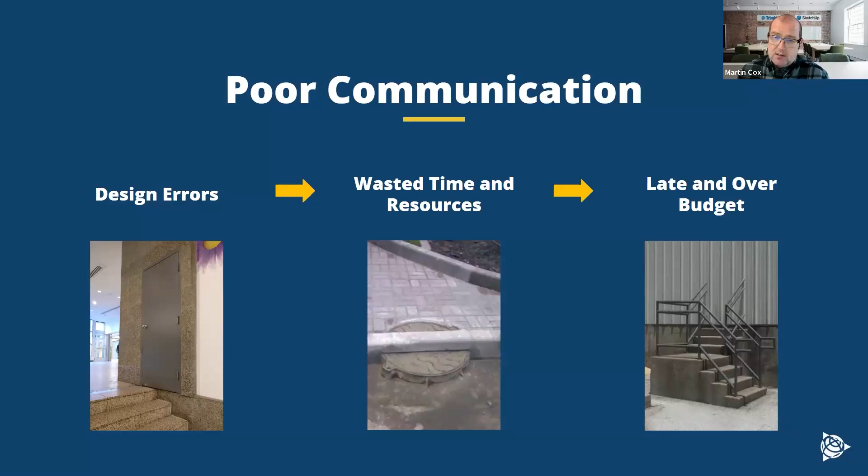So first of all, what is connected construction? We talk about the three C's, and these are fundamental building blocks within that construction process, that work across the entire Trimble portfolio and also other pieces of software as well. SketchUp is a true collaboration tool, and we'll certainly talk about that. So the three C's in connected construction.

So we have connected. This is breaking down these data silos to improve interoperability and document management. The benefit to customers is that all aspects and the different phases of a construction workflow are easily shared, easily discussed, and easily understood, so everyone can work through this as well.

Then we have our content. Streamlining our workflows means that we have our library of data, all curated, so it can be traceable. The benefit from this means that everyone is looking at the same thing. So somebody's not looking at an old version of a drawing and mistakes are made there. People know where something goes, how it needs to be installed, and the equipment that you have at that time.

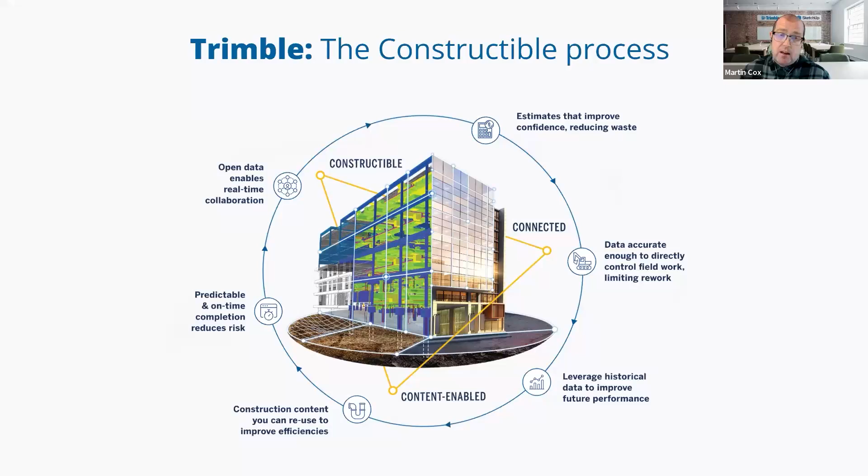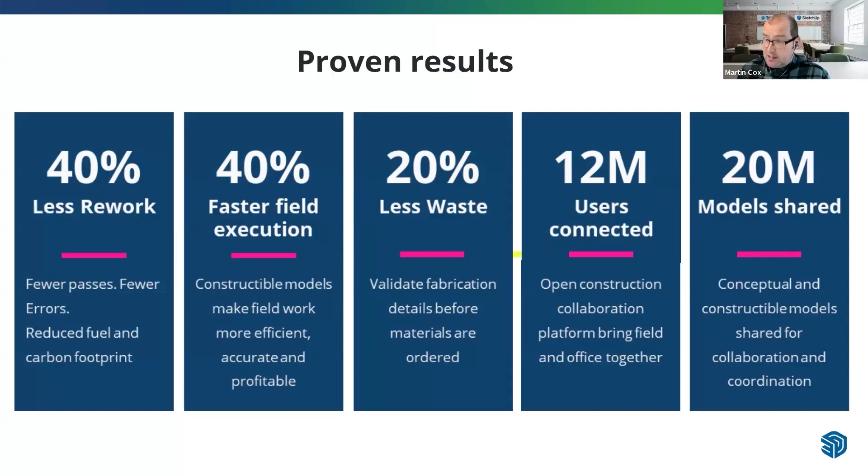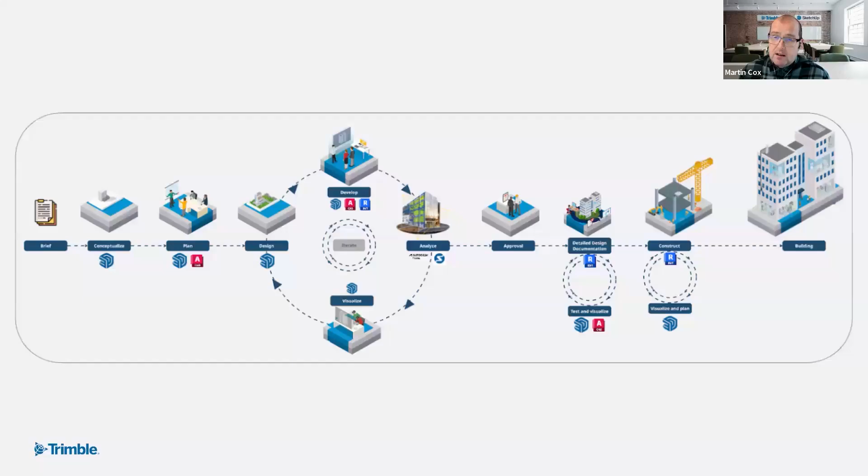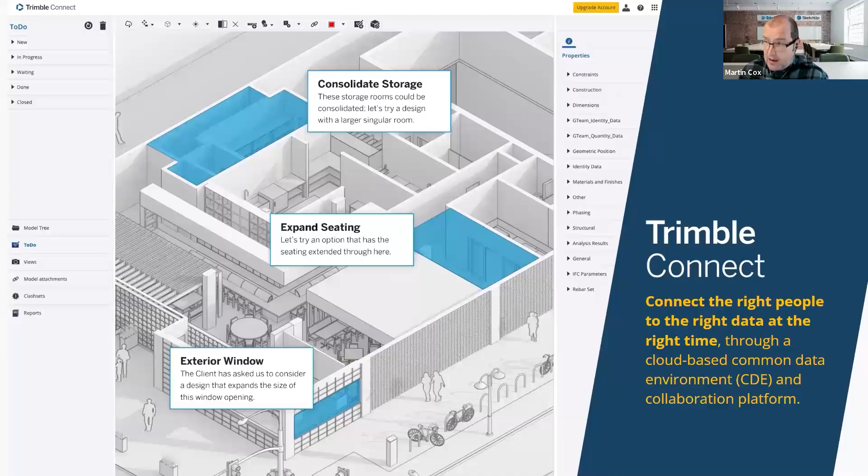But a key part of this is our connected construction. Trimble Connect comes with the SketchUp license. Trimble Connect is a cloud-based platform that connects the right people and the right data, so everyone has access to this. Okay. So how does SketchUp really help communicate?

So now we're really going to focus in with SketchUp. Now, it's worth mentioning that as I'm talking through the next slides and with our example demos as well, we're going to be looking at multiple versions of SketchUp. So there are different levels of SketchUp. We have SketchUp Go, SketchUp Pro, SketchUp Studio, and there's other ones as well. And they have different tools and capabilities.

I'm not going to go into details in this webinar about all these different versions. Best thing to do is talk to your partners, talk to your reseller, and they will find the best fit for you, depending on the workflows that you're looking at for SketchUp. So just be aware that some of the tools, depending on the version of SketchUp you have, you may not have, but I'll try and point them out as we go anyway. But yeah, your partners will be able to help with that and recommend the best fits.

So where does SketchUp sit within that communication workflow, that structure workflow? We understand where SketchUp sits. We know that the majority of users are using SketchUp for visualization. Also presenting ideas and sharing those models as well, and documenting this. And then we start looking more around that model sharing, coordination, whether it's construction sites, estimating, analysis, and then fabrication. So we can really see where the power of SketchUp sits within our different workflows.

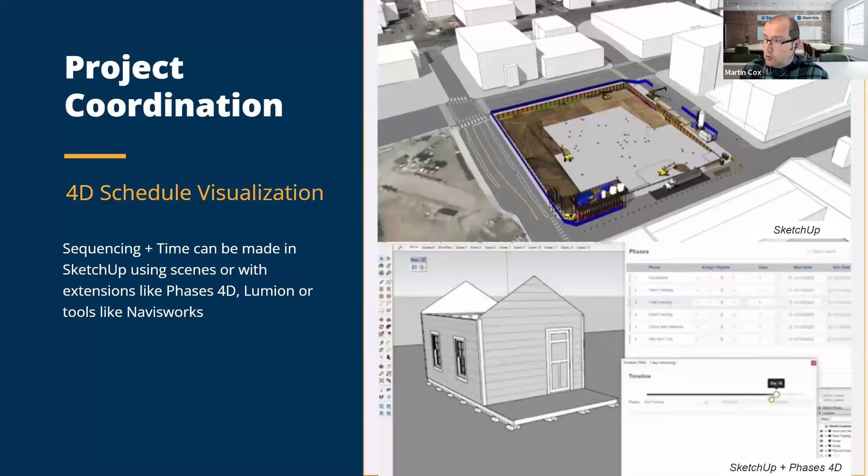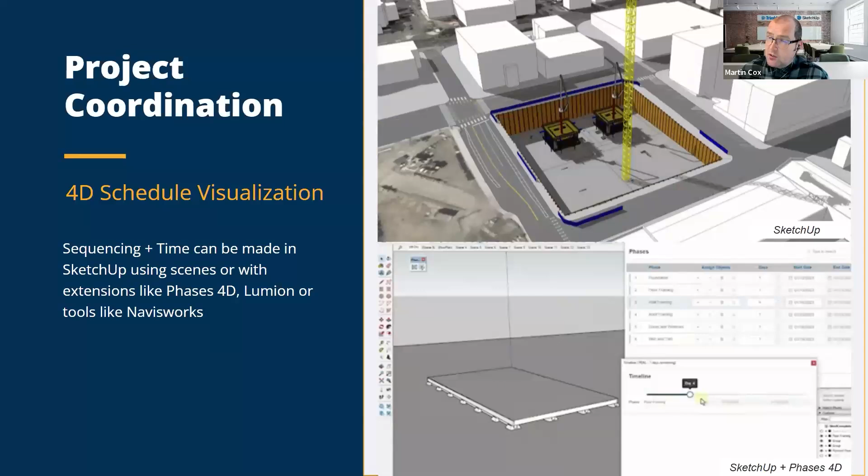Okay. There's also that project coordination. So the 4D schedule visualizations. With the addition of time, we can actually create these 4D schedules at different levels. So basic 4D sequences have been created within a planning model to show where the site is going to be, the stages around a site, and where things are accessed there. Or again, you can use different extensions like Phases 4D or Lumion, Navisworks, that actually create some of those schedules as well. Now that's one area within that coordination.

Another one is in project coordination around site logistic plans. With the complexity of construction projects, creating site logistic plans is standard practice now. Often, they can be a static 2D drawing that remains the same, but with SketchUp, these plans can contain full elements around the construction, as in we can show delivery routes, locations of where things are going to be. It's great to be able to communicate the site design to a customer saying, okay, this is where your site is going to be. This is where we're going to put our equipment. This may be where you're going to lose some parking spaces. So, this is where the communication comes in.

But understanding those processes, also being able to identify areas where there are potential inefficiencies, areas of concern or conflicts, like we mentioned about those timings of saying, well, while the glazing is going up, people cannot work underneath there. So, you have that area of glazing, you don't bring in the team to do some groundworks underneath the glazing. So, we can show that. And SketchUp is often used in these logistic plans because of its flexibility, because of 3D Warehouse, being able to bring in and say, okay, this is where a crane is going to be, this is where a lorry is going to be.

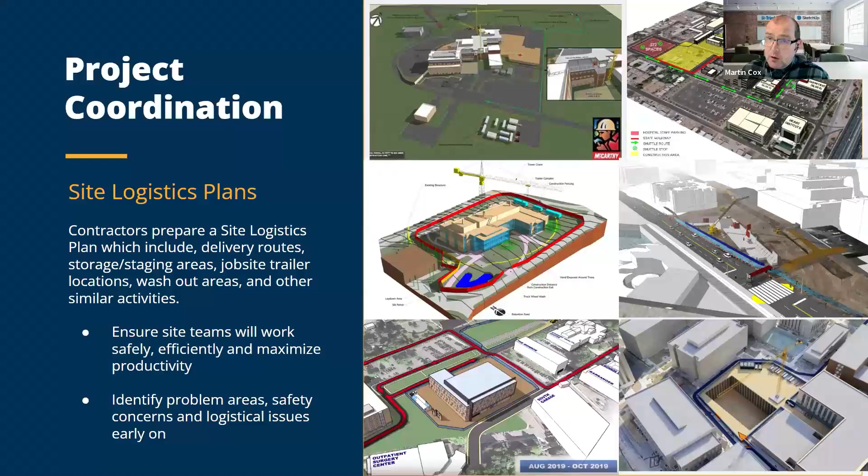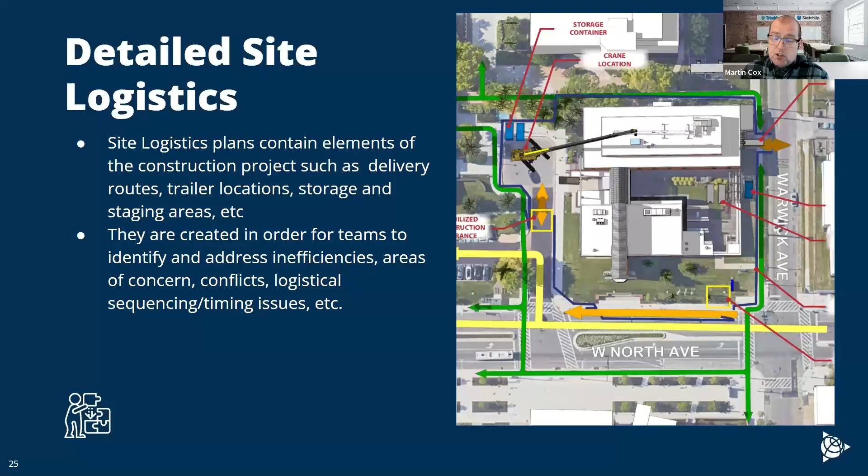And working within those detailed site logistics. Again, you can see how clear it is with our 3D plans here. We can show delivery routes, delivery locations, storage locations, those areas as well. And it really helps with all of those things that I mentioned. So this is a huge part of where SketchUp sits with a lot of our construction customers.

Now, something that still happens on a regular basis is these construction mock-ups. These are basically showing potential complicated areas, and construction companies spend thousands of pounds, euros, dollars, we're all over the world in this webinar, so they spend a lot of money actually showing a physical model of how, in these instances, these glazing assemblies are going to go together. They're quite complicated. The physical mock-up is usually developed before the actual assembly is going to be performed, so the trades can learn how things are put together.

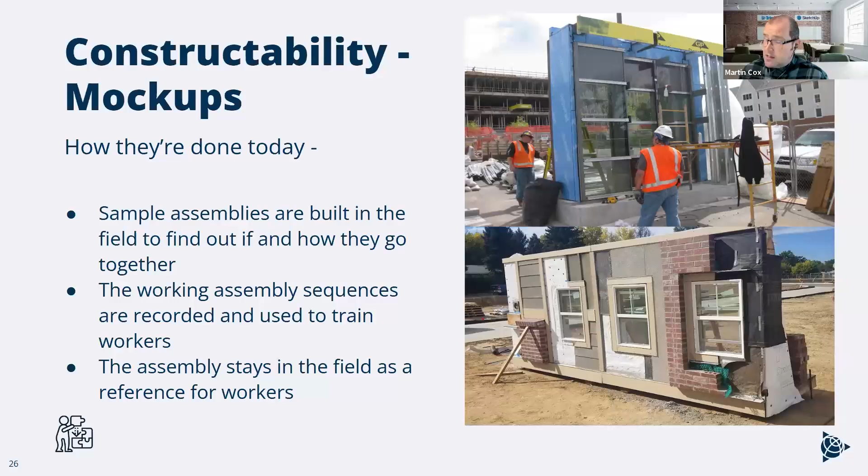Now, that stays on site. It literally sits there, so people come over and they have a look at that. But again, a big part of this is creating those virtual mock-ups. These virtual mock-ups are created before, nice and early, so they can assist the assembly processes. During design, models can be exploded. They can be shown with more detail. Even with those physical models that we saw, things can be hidden. So they're carefully designed so that they're almost showing those layers.

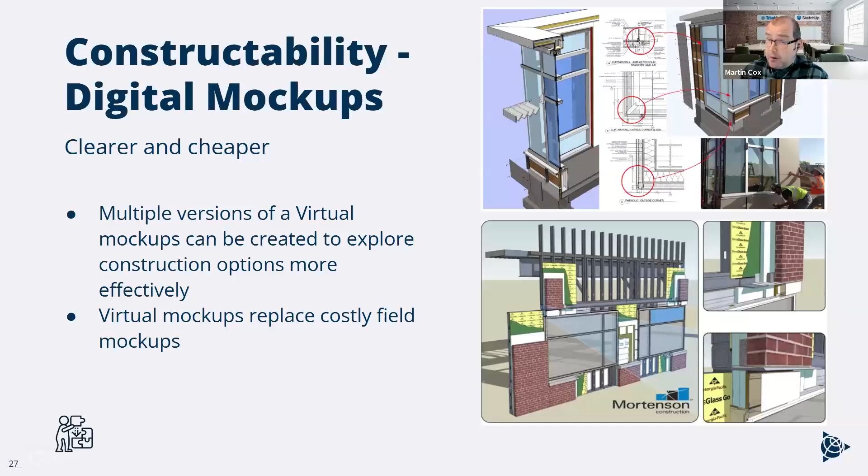Whereas a virtual mock-up can explode, it can be hidden. So we can show details here that you could never make, like this example here, seeing how that sits on top. Detail zooming in, cuts and those crops there as well. And as you can imagine, these are much cheaper to make, and it can go into much more levels of detail. So those three-dimensional details can really show the clarity, so it's more clearly understood on the job site. And these are all real examples, where we've worked with customers around the world.

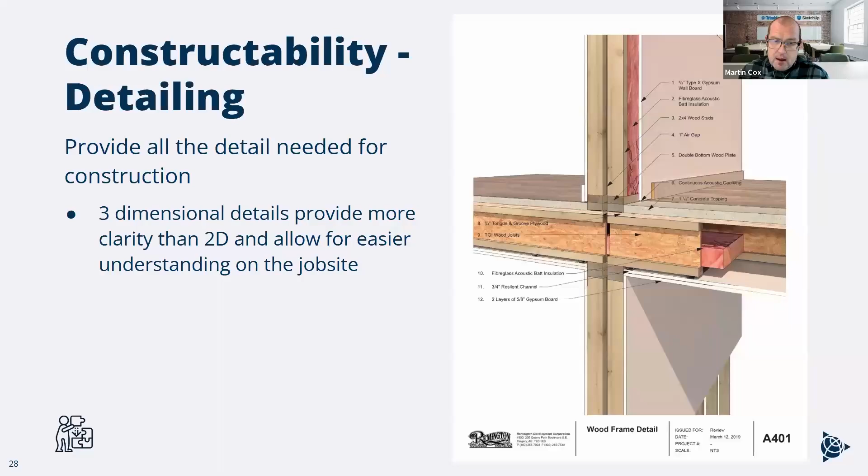Okay, so let's get into some actual examples here. Let's start having a look at SketchUp. Now, for the next example, I'm going to show a video here, and it will help explain this because I'm going to talk through these different options. I want to walk you through how some of this integration happens. We're looking at using Connect here, using SketchUp right from the beginning of a workflow and seeing how that expands all the way through. So right from literally setting up that site, but then we're going to introduce some other tools and see how they work within this workflow.

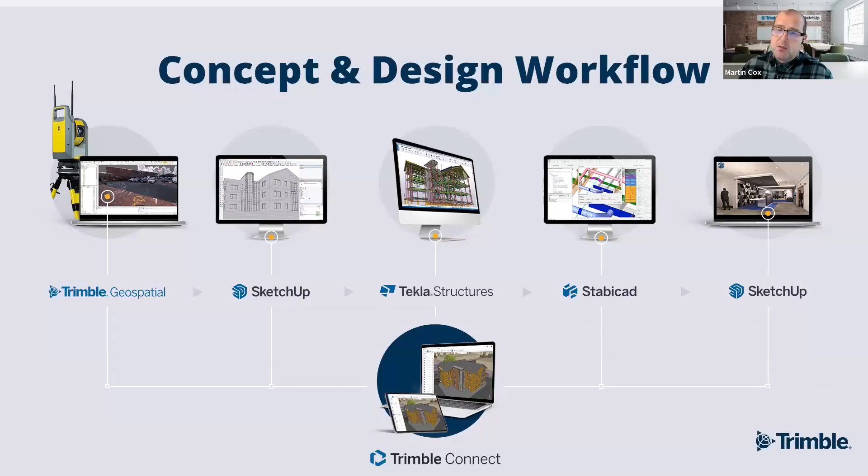So this is a video that I am going to talk through. I may pause it sometimes. I will be completely honest, I don't believe in trying to trick anyone with any video editing. The reason this is a video is we're showing a huge amount of information, different tools that I would be swapping in between, and it's much easier using this option here. So starting right at the beginning, we'll just start this video here.

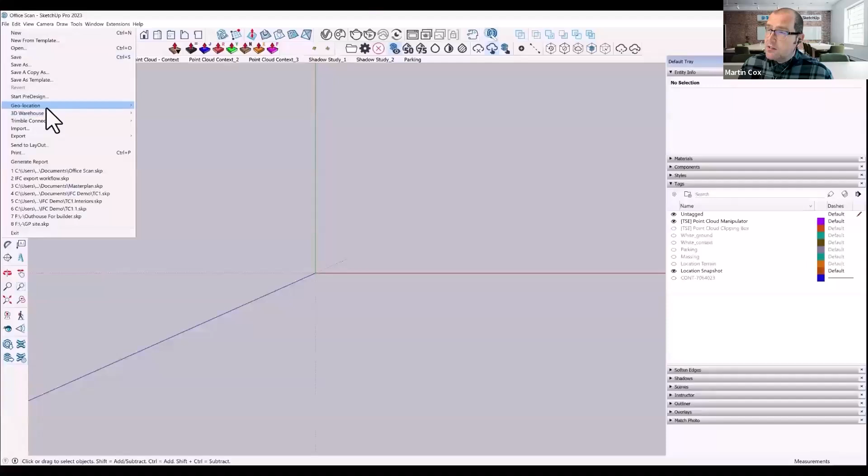So we can literally import the site information using Add Location in SketchUp, so it will be a geolocated model. Using the geolocation Add Location, we can import map data straight away. So bringing in this map data of our model, we then have our site plan. And this does contain the tags regarding the terrain. It's not overly bumpy, this area, but it does show that terrain for the model. And it means we can then quickly create a plan just using some quick 3D models.

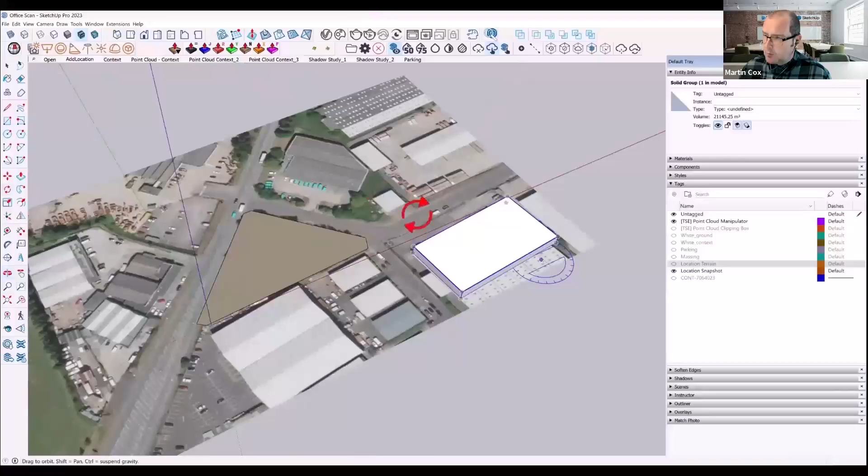And we'll jump to a model here saying, okay, this is how our site looks with some models around it. So this gives us an idea. We can look at shadows. We can look at how models, buildings that are going to be in place, will help with crane positioning as well.

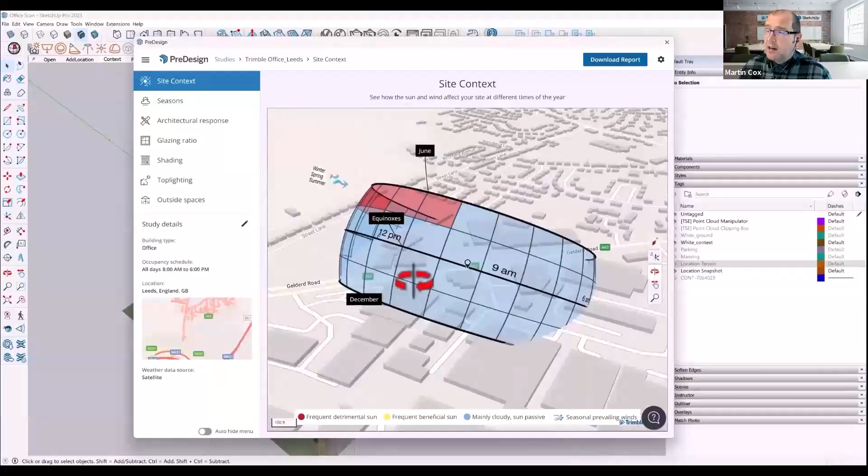Using a tool such as SketchUp PreDesign, because our model is geolocated, we can look at sun and weather data, which will help with the construction process, because we can look at historical weather data to see the type of light that we're going to get, how much rain we get, and, for cranes, wind conditions as well. So it gives us a lot of information here. It also goes further into architecture, but we're not going to look at that. Using a scan of the site, opening this with Scan Essentials, which is in the different versions of SketchUp.

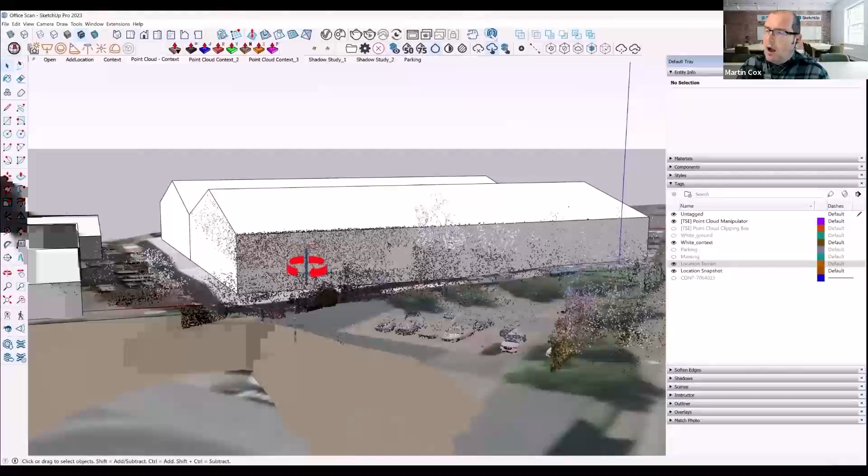So if you have SketchUp Pro, you won't have Scan Essentials, but we can actually import a point cloud of our site. So we have a real life scan here using Trimble's scanning hardware, and we can actually see the site now with regard to those building conditions around. So we can actually look at how accurate our models were with the actual buildings that were scanned. And we can really start analyzing it and making sure that we get these in the right position.

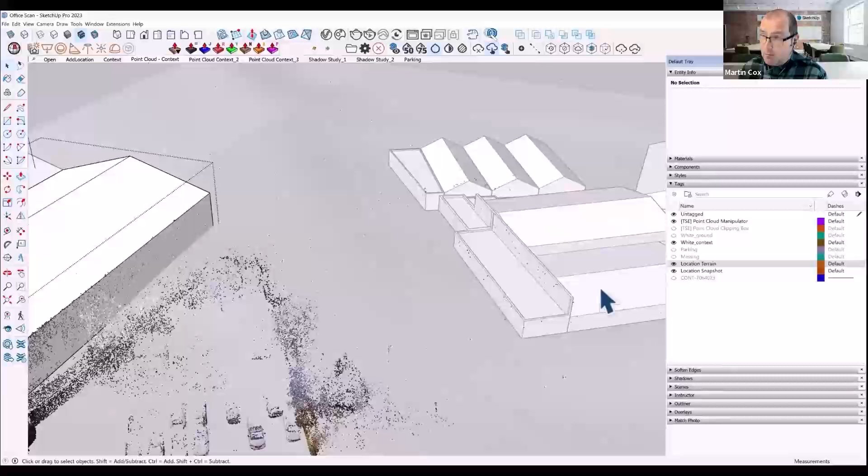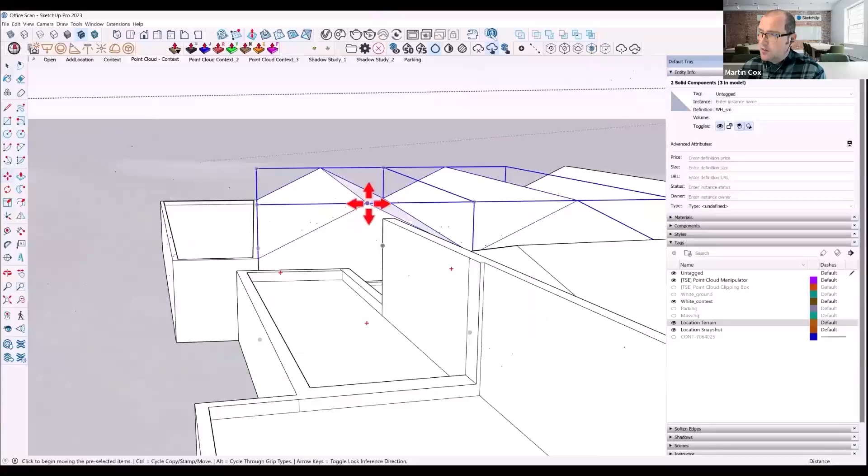Again, particularly important for access and machinery, because we need to know about potential overhangs on site. So we can see here, actually, there's a little bit of a roof that possibly we've modeled a bit lower. So using the SketchUp tools there, we can easily adjust that roof so it fits in with our point cloud.

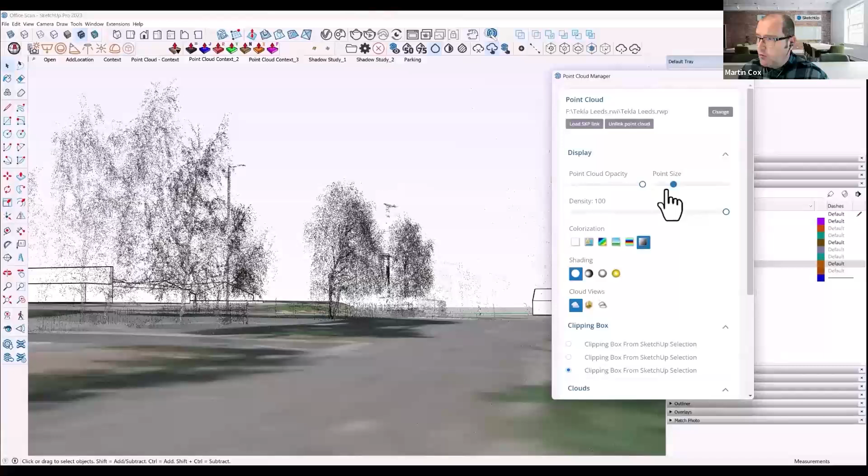Now, the point cloud is a great reference there. It means that we can see trees. It means that, like I said, particularly with deliveries and access around there as well, we can make sure we're aware of those trees. But there are a number of other tools within Scan Essentials where we can show things clearer. We can change the point size of our point cloud, but we can also actually analyze the model so we can compare the point cloud to our SketchUp model.

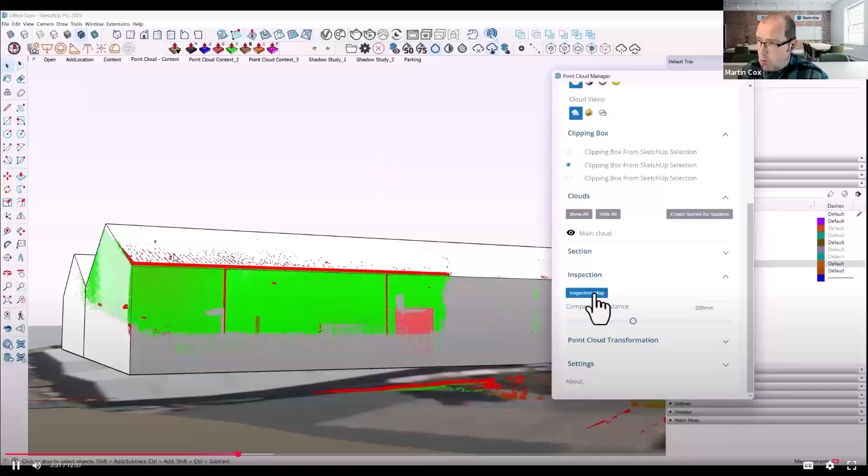So what we're showing here is that using the inspection tool within Scan Essentials, we can actually show if our model is correct. And on here it says 200 millimeters. So that little red area means that our model isn't quite right with the inspection there. But there's a lot of information.

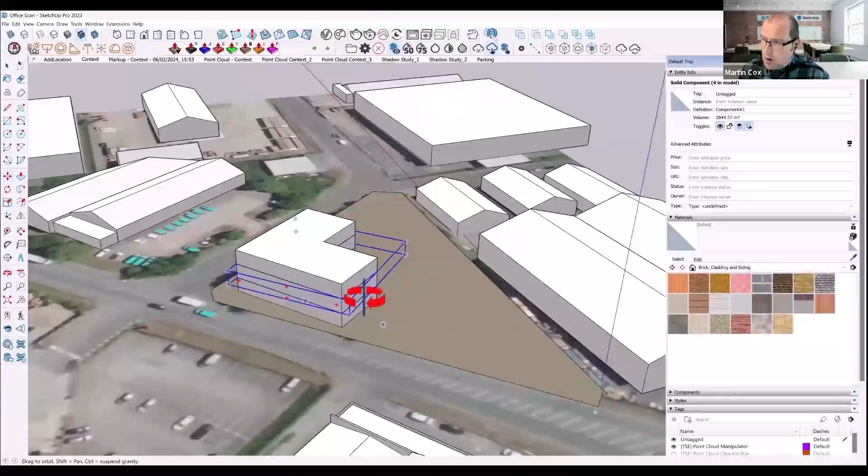Then we have our site. Using SketchUp, we can now create our concept design for a model. So concept design at the beginning, we're not thinking about how we're actually going to build this. This isn't our full constructible model. This is showing some ideas. So this is a video here showing how quick and easy it can be for SketchUp to create a model to show visually for people, saying, okay, this is our site, this is our plan. What do we think about the idea of the model here?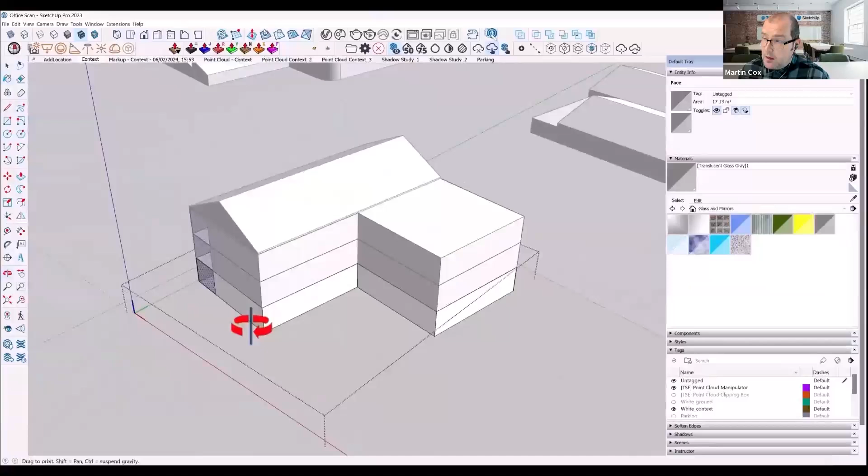We can create simple block models using components. So each of those floors is its own component. So we edit one, it edits all of them. And we can then say, well, actually, let's put some glazing on the corner here. Let's put some of those brick materials on. And we can place our roof how we want it.

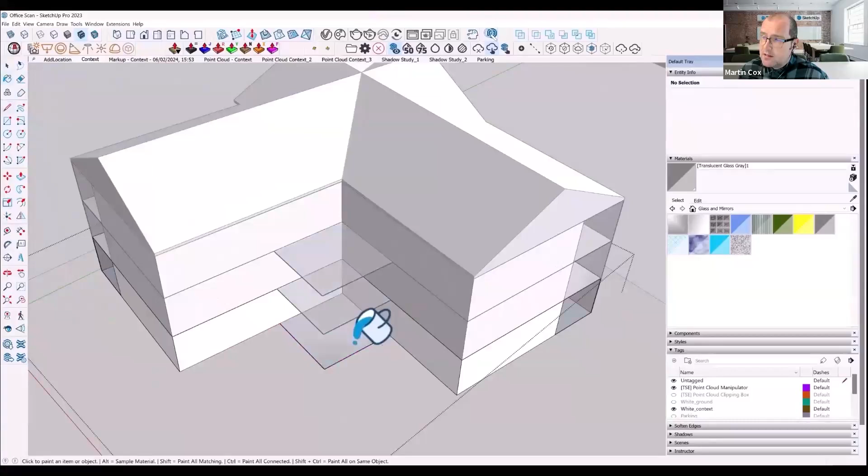Again, just think about how quick and easy it is that we're doing this, but for our customers to be able to say, okay, is this what you're thinking? Let's have a look at our site here. And is this the type of thing you were looking at? So being this fast, this easy to do is tremendously powerful. And just creating those simple models is great.

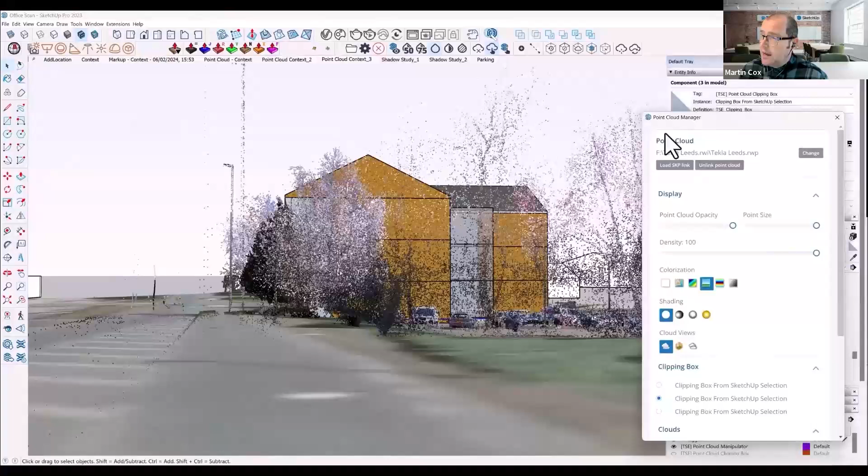And then, within that planning, we can start thinking about our site there. So we're just finishing up here, combining that with our point cloud. We can see how it sits within existing trees, basically the existing site that is actually there. With that scan, we can incorporate that. So we need to be aware of those trees, particularly with construction. It's like, right, well, we're not going to put a crane there. So it's being aware of our environment.

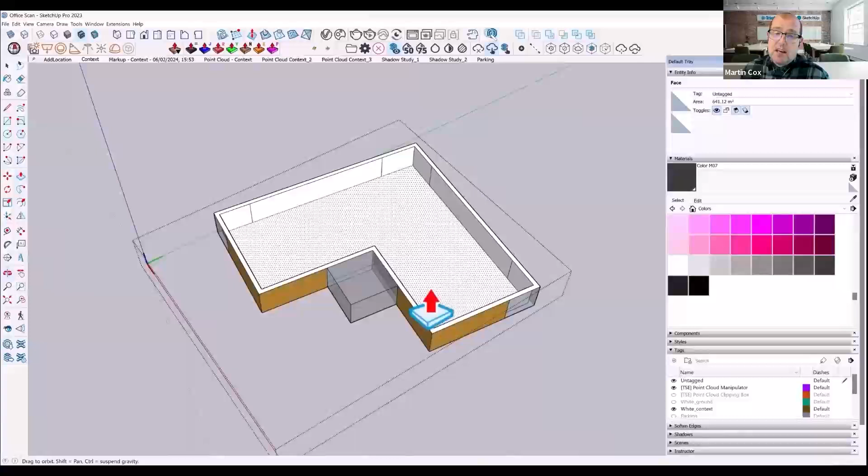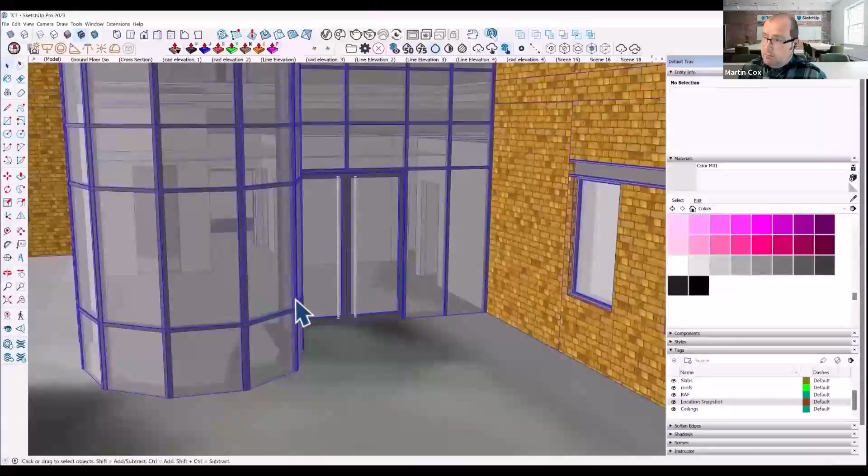And we can also start thinking about that on the interior as well. So it basically takes our model and then those iterations around the model. Okay. So we've got a little further with this. We've added some logos, a little bit more glazing detail. But then bringing that on site, again, just being able to show the details, we can really start saying how this glazing detail is going to be made around the staircase and a little bit more information about the interior of the buildings.

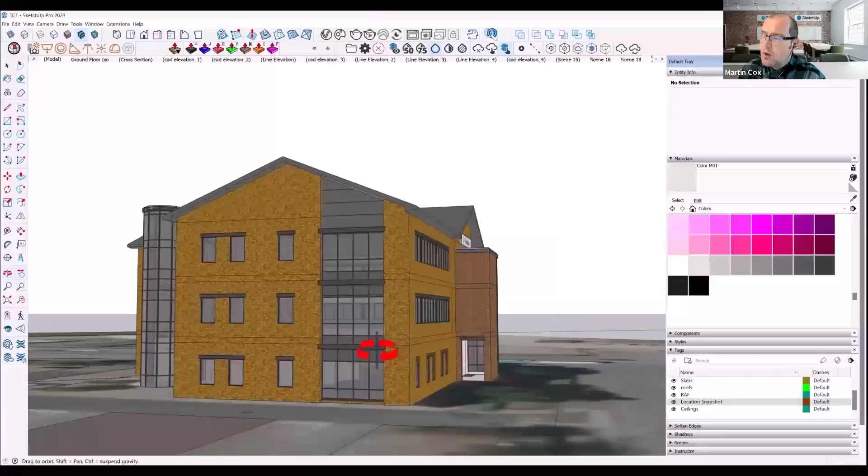So now we're moving into, we have an architectural model. But taking this, again, communication around that. We start having our model. We can start putting this into Trimble Connect. We can look at this and then say, okay, well, using the different tools in SketchUp, we can actually have our line elevation models and create our information packs in LayOut to show the drawings and capabilities around here.

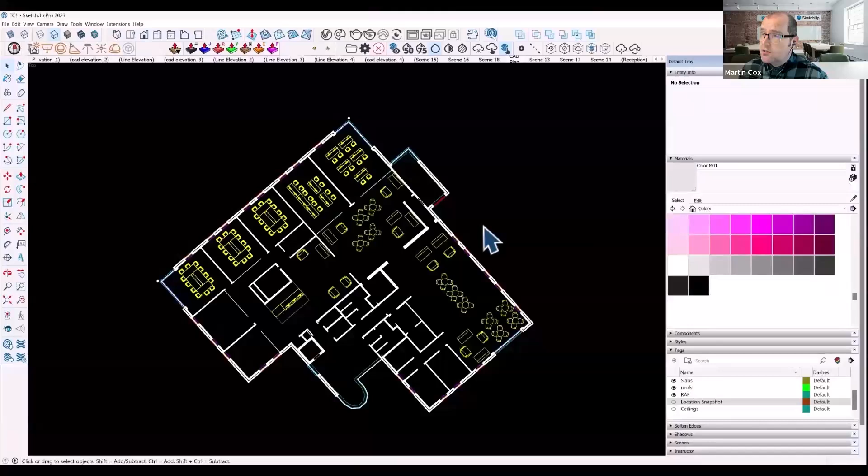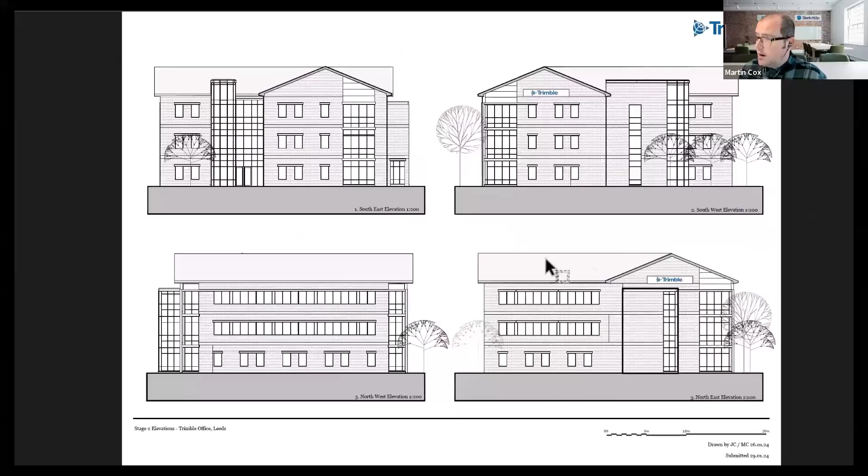So, we're exporting this to LayOut, Trimble Connect in this instance to start with, but then within LayOut, we can have our drawings and at least show people, like, yep, this is how your model is going to sit. These are the intentions of our training rooms, just an idea of how it's going to look. But then we can take it even further with connected construction.

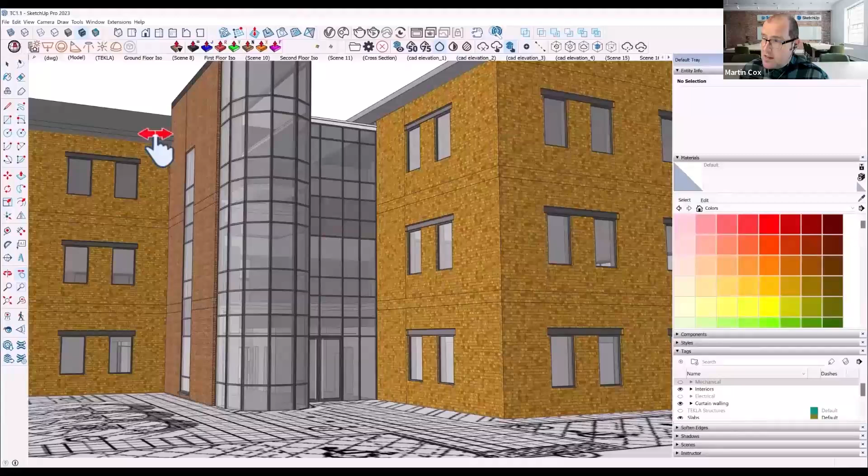So working in Trimble Connect here at the moment. Inside Trimble Connect, we have the structural models. We have the MEP models, which are the electrical and plumbing models. So, mechanical engineering, electrical and plumbing, sorry. So, we have all of the models within Connect. Now, the great thing about this is once they're in Connect, we can then use these actually within SketchUp.

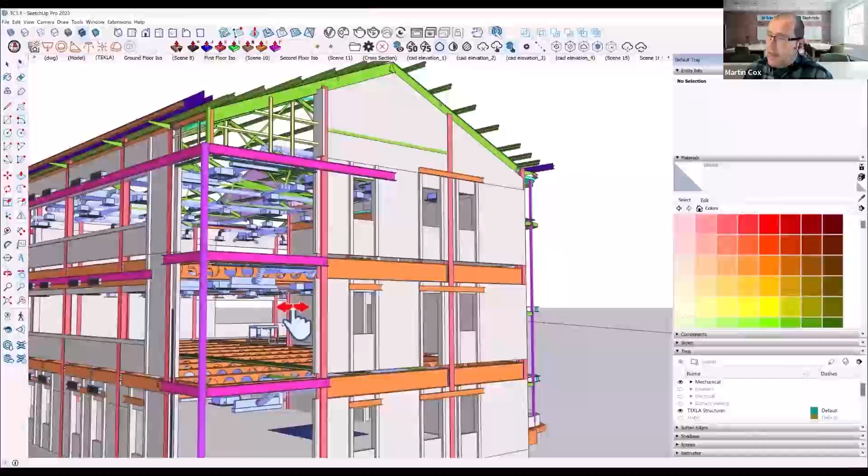So we've imported the Tekla Structures model in SketchUp here, and we can see how that Tekla model looks. But we've also imported the MEP model in here, so we can look at the mechanicals around our ductwork and piping. So we've got our HVAC equipment there. And now we've got our electrical equipment. We can see where actual plug sockets are going to be. And these are real life positions within our model.

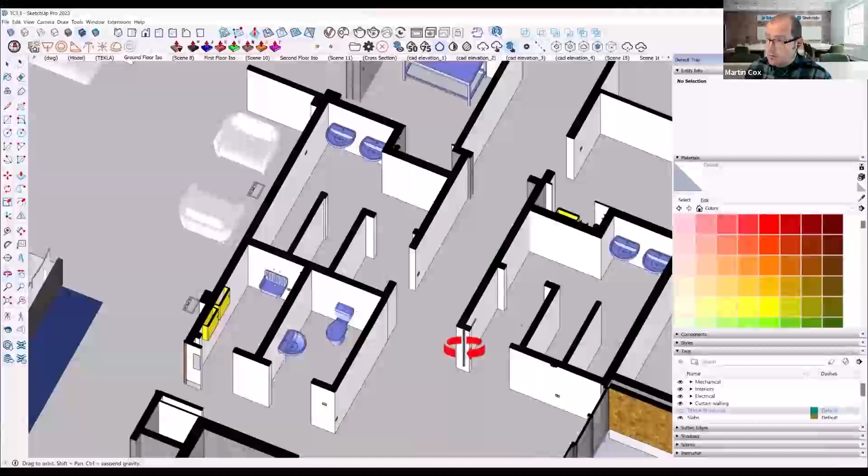So looking at the model now within our architectural model in SketchUp, we can see those correct locations of plumbing. So, these bathroom accessories aren't from 3D Warehouse. These are actually from the MEP model, which is where they're going to be. The yellow parts, these are the electrical models. So we can see where light sockets, plug sockets, smoke detectors are going to be within the site. So these are the actual locations.

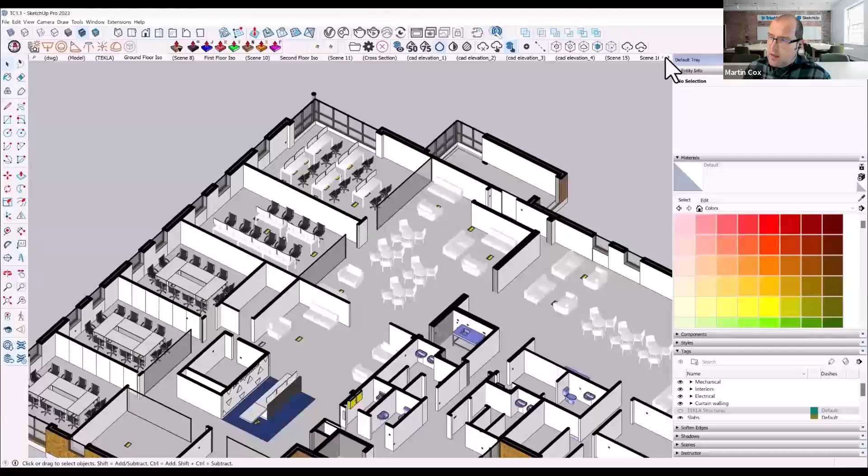So for our training suite that we have in the corner here, we can see those plug sockets in the floor. Are they in the correct locations? So, we have that information. We can see that they're going to be in the right place. Now, this works on multiple things. We can see that we're going to have the plug sockets. This is something we've worked on with hospitals; they really like this because they need to see access around certain things.

But the good thing about this is we've got a design model around here for our reception, but actually that floating light box is sitting directly over the top of an air conditioning unit. So, that's something that needs to be looked at. But within our model, we can actually see there's some exposed steelwork there. It's like, right, yep, we're going to need to box that in. So, we can quickly highlight that.

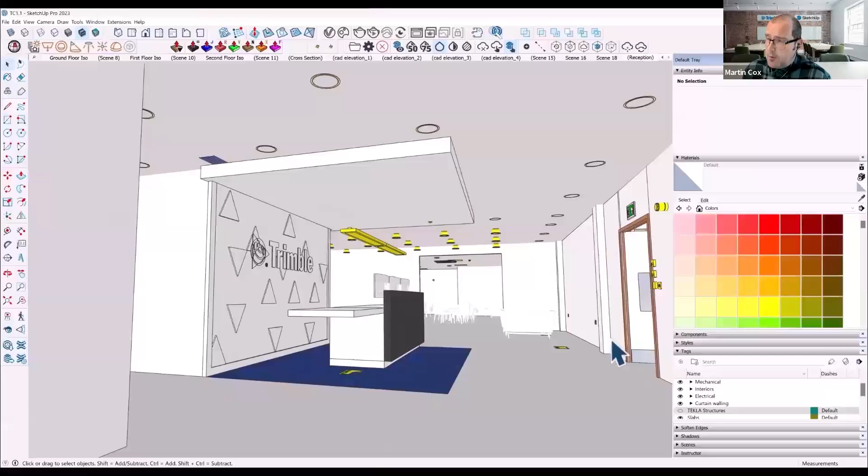In Trimble Connect, we can put that as an information request and say, look, we need to box this in. But we can then also look around everything within there to say, yep, we're making sure we've got all our sockets and information as we go through. And the great thing is because we've got this level of detail model here, we can then actually bring this into V-Ray for SketchUp.

So again, in versions of SketchUp we have V-Ray included, and all of these little lines and circles are actually light information for V-Ray, so we can do a full render to show how it's going to look, realistically. So we've got our lighting here. We can see that in this instance, the air conditioning unit has been moved. So we retain that light part there. It's all been boxed in, but we actually have those switches and the fire detectors within our render. So, this is a real life render within our reception.

This can also be useful externally as well, because you're rendering everything. So, we're highlighting here that we've got all of the MEP equipment and the HVAC equipment appearing in our model. When we communicate that, we can show the lighting information. So we've got that lighting detail up the wall on the internals there. But even little details like there's some plant on the roof there. This is something that often catches people out. It's like, oh, I didn't know there was going to be a large unit on the roof.

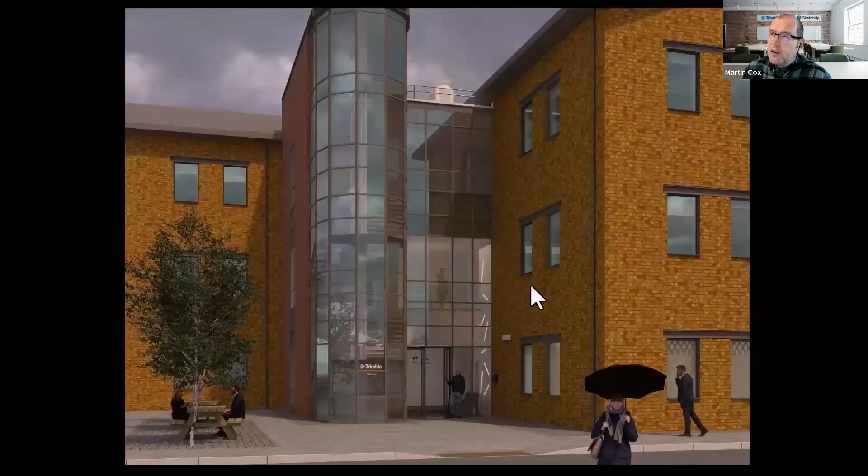So actually having this connected construction information shows that model all the way through. And we can see our steelwork through the glazing and that plant equipment on the roof. And also this model was for Leeds. So of course they're showing somebody with an umbrella, because we're up north a little bit there. This one's sunny, but we can show those existing trees as part of the rendering. And again, some of that electrical equipment, the ducting above the windows.

Okay, so as you can see, that's a lot of information we showed there. We looked at Trimble Connect, we looked at Tekla Structures, we looked at Trimble scanning, we looked at MEP, all around the SketchUp model, and our SketchUp model was there sort of all the way through.

There's other elements, and I just seen a question come in around that air conditioning unit being hidden. In Trimble Connect there is actually a conflict option, so it will show where models are actually hitting, and there are conflicts within Trimble Connect.

Okay, so what we're going to do, I'm going to have a look through here. We're not having a look at that one again, I want to go into SketchUp now. I know we're coming up on time, so I want to make sure there's time for questions. I'm going to be pretty quick here showing some of those features in a bit more detail in SketchUp. So the first one I'm going to show is SketchUp Scan Essentials.

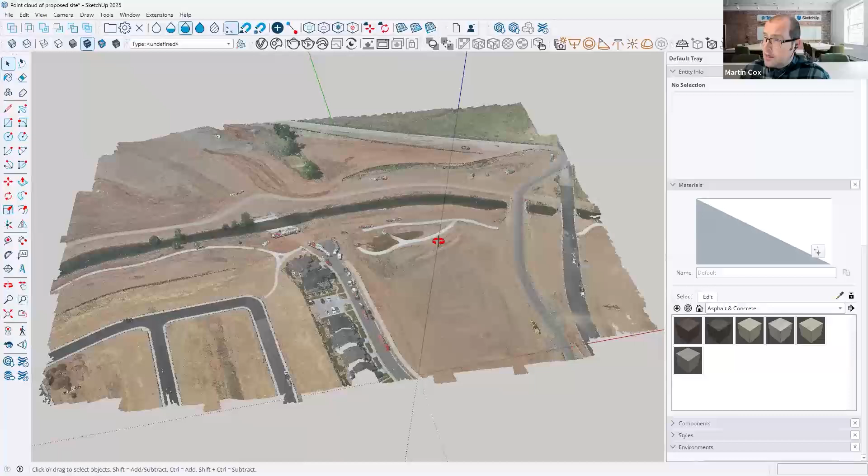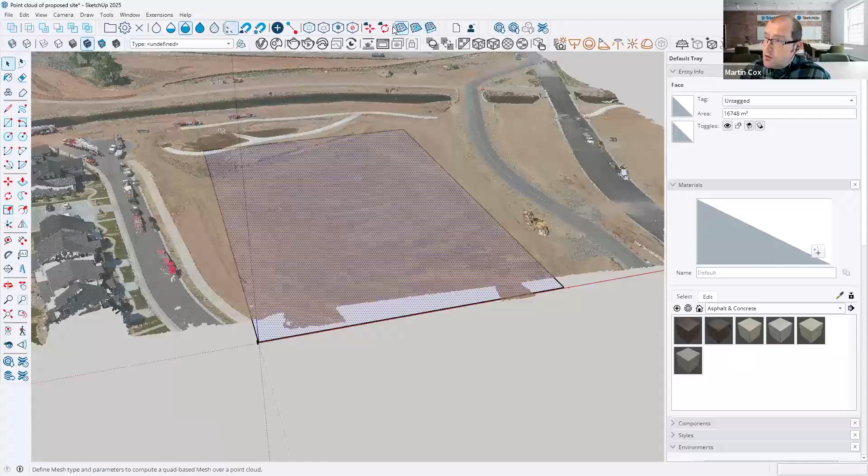This is my scanned model here, and this is quite a large scan from a drone of a potential site. The good thing is this isn't just a dummy model here. I can take my site, quickly sketch or add a rectangle of the area we're going to be constructing, select that square I've just drawn, and using tools within Scan Essentials I can create a ground mesh, which creates a full surface of that particular area that I can then work with in SketchUp.

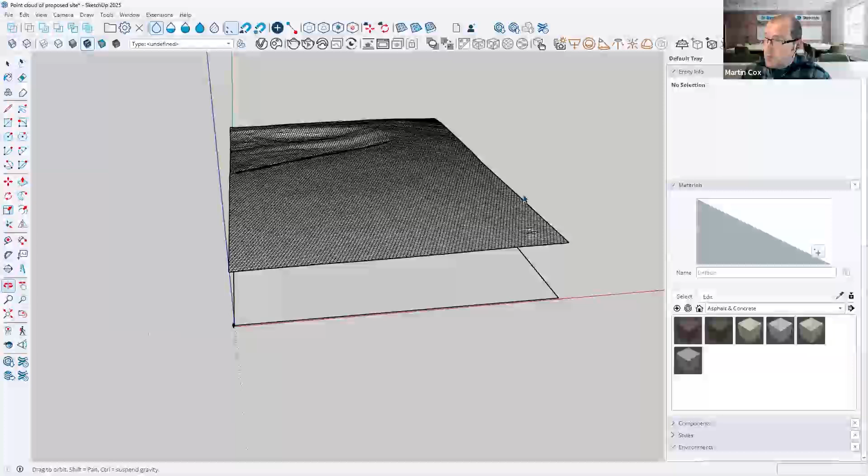So I've now got my ground mesh. If I just hide that point cloud, I can see I've now got that ground mesh that I can work with. I can select my ground mesh and turn that into a solid as well. Again, these are in the Scan Essentials tools, so we can see we have that model there to work with.

Now there are other things we can do. We can cut out the area that we're going to be working, and you can actually analyze the area to see how much soil movement there's going to be.

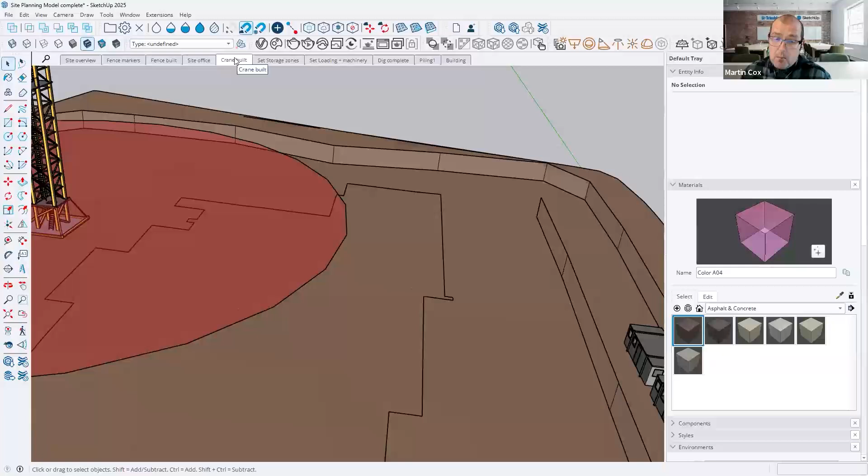Within our site planning model, I've got that area, the solid I've sketched on, and we can go through step by step to say okay, this is where the fence markers need to be, the fence built for the site, the site office using models from the 3D warehouse, the crane position of our model.

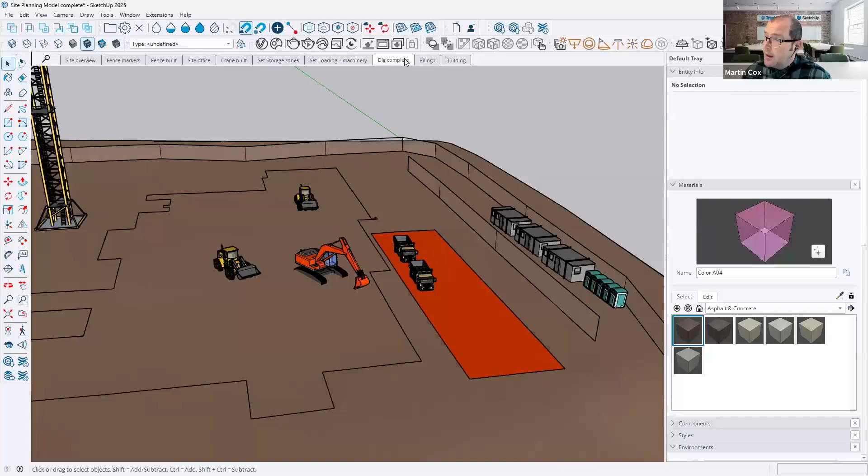This is great within there - the storage zones that we can specify to say this is where our materials are going to be stored, the loading areas using our 3D warehouse models of the areas where the machinery are going to be, and we can even start putting more information in, such as the dig we're going to have there, and using the Tekla Structures model we can show the building.

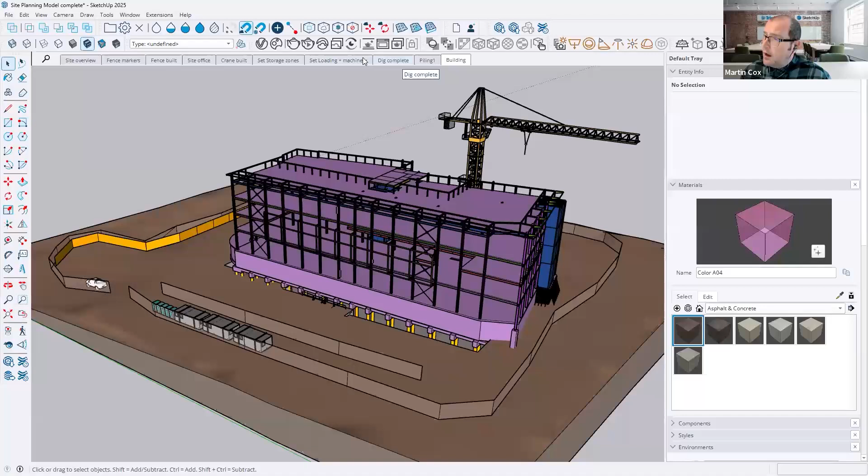So this is a simple example, taking our Scan Essentials site model and bringing that through. Now if I go back to our loading and machinery, or actually our dig on this one - another example of where SketchUp is used quite a lot is showing where health and safety equipment is needed. That's a big part there as well.

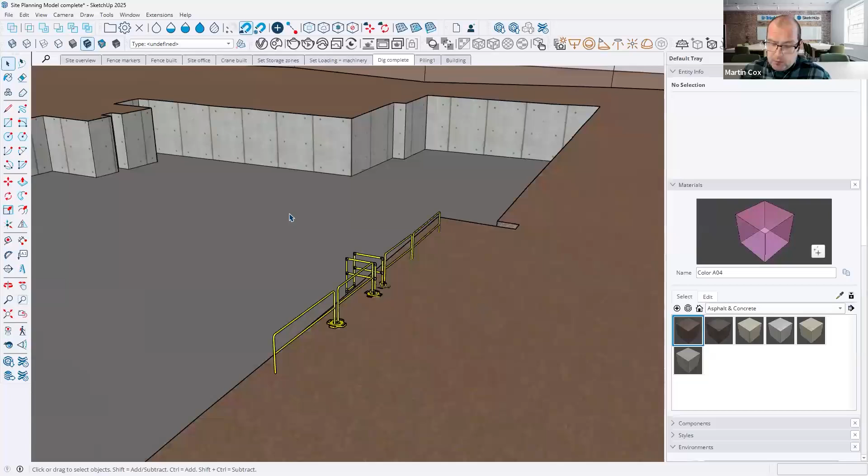Okay, now I'm going to show a slightly more detailed model, another example of how we can take this a little bit further. This is a great looking model - already it looks like I'm looking at a render, but we're using the new SketchUp 2025 environment and materials. So we can actually see that's how the model looks in that instance.

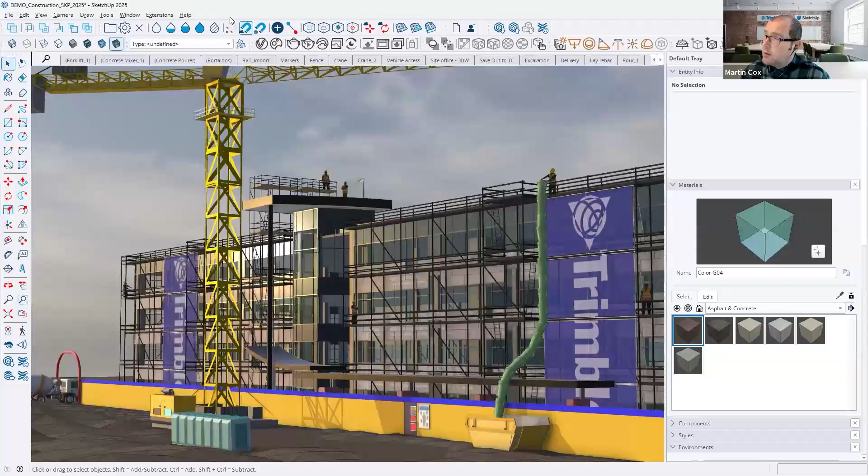Now what we're going to do, I'm going to go right back to the beginning here, because I saw a question come in around working with other models and collaborating with other models. So what we've got here is a Revit import, using the Revit importer that we have in SketchUp - again, different versions of SketchUp. So we've got our model that we then know, but we can have a look at that site using our overlays here within our styles.

Our styles that we set up here, we can set those and set the edits, and have our watermark over the top. This is how this is done - a lot of people wonder how we're doing that, but it's just a watermark over the top, a PNG watermark.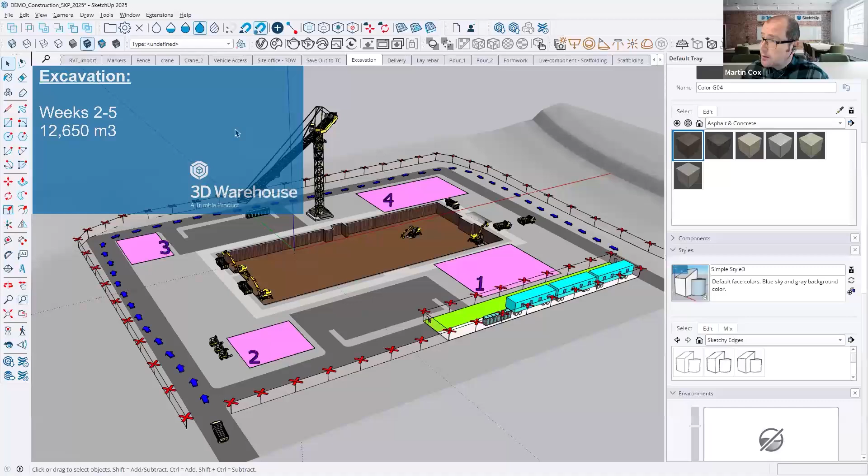So we have our excavation of our site. We look at our loading zones, and then we can really look at the deliveries. We can control with the arrows, specifying direction of movement around the site.

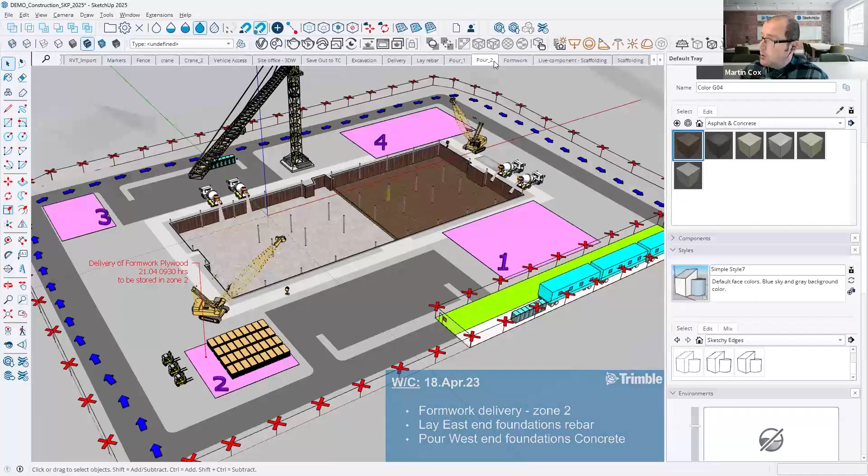Using scenes and different transitions here, we can start creating some quite cool effects to say okay, the rebar is going to be laid in that week. Then we have a look, we start doing the pour, so more rebar. We have the cement pour there. Then we've got the second part of the pour, and lovely fun little details of the concrete coming out of the trucks. The formwork's going to go in, within our pour, and then start putting up our scaffolding.

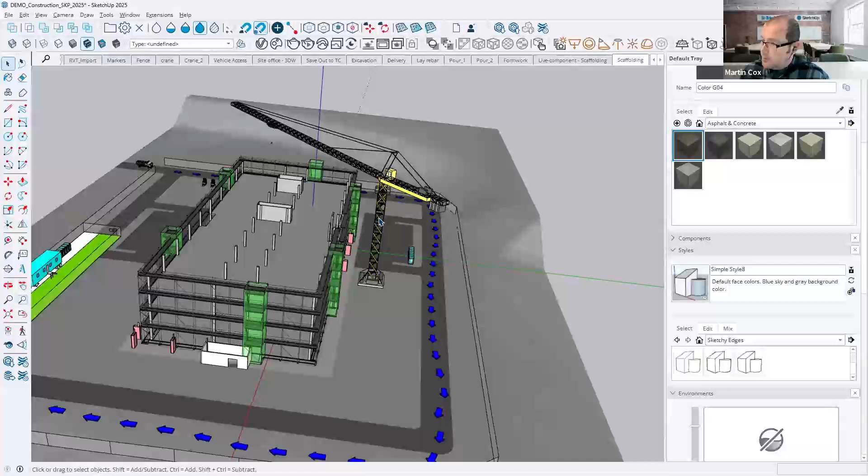We can have our scaffolding zones and label those to say these are the staircases that we're going to be having. By labeling those staircases with our detailed zoning, we're simply able to say staircase 3 is going to be out of action at these particular times.

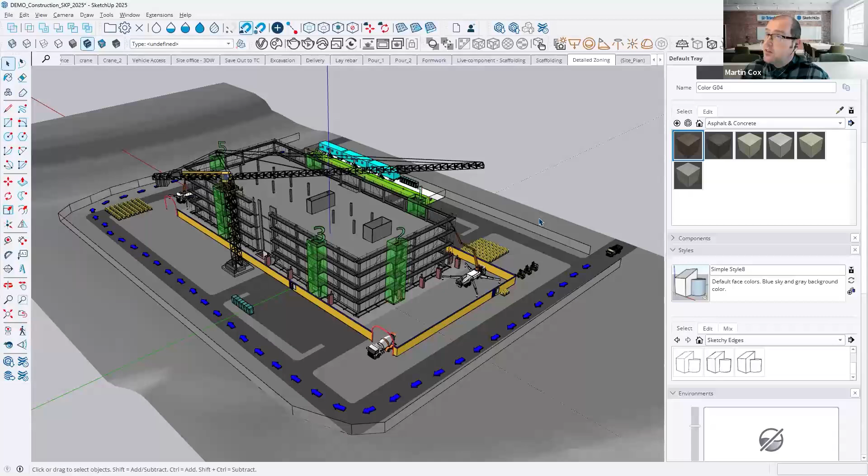And we're still using the Revit model - this is still the Revit model, but because we're using the Revit importer, it recognizes the layers, so we can switch things off, such as walls and glazing as well.

We can start really sharing site plans around this, and people can start marking those - the signage that's going to be required on site, we can specify those requirements for sites. Within Trimble Connect, you can link PDFs to those particular signs and say this is what we need to be loading. We can import more IFC files.

This time we're importing a Tekla Structures model to show that we have our roofing steelwork there as well, and we can see our roof structure.

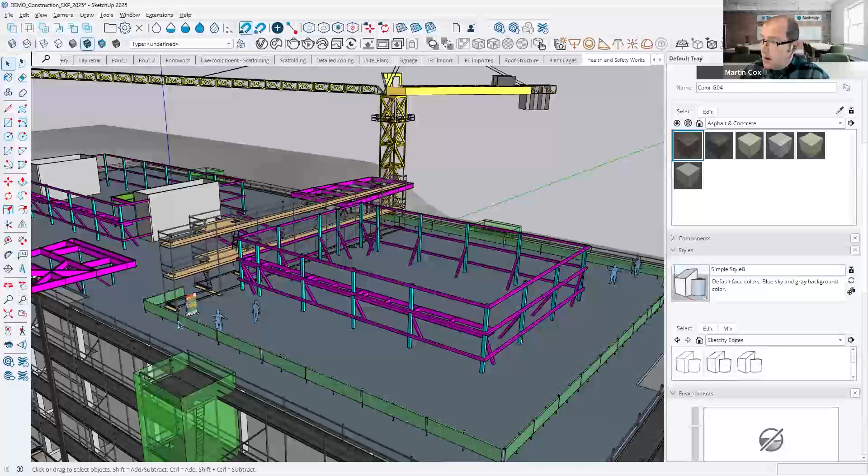The plant cages that are going to be assembled on site, the health and safety that we're going to be looking at, more signage, and even - this is something we see a lot as well - little 3D models that show you need full harnessing if you're going to be working on a roof.

Lots more drawings, visualizations here, and then we can get back to our visual model that we looked at. So I wanted to talk through that pretty quickly there as well.

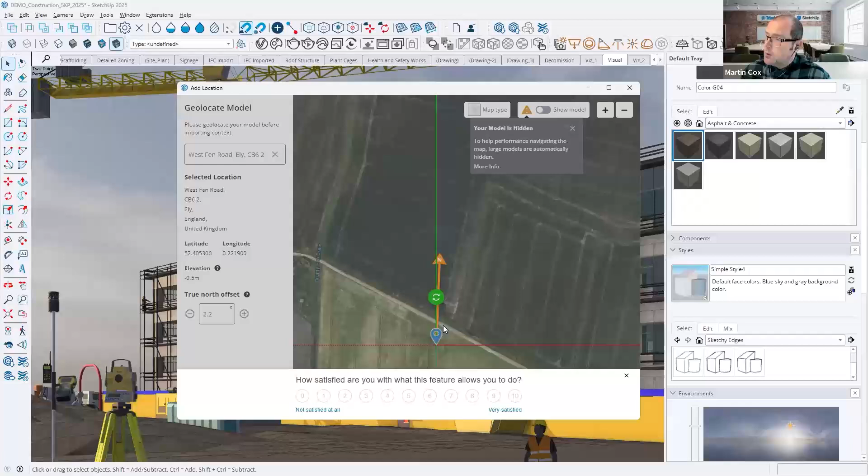We can actually geolocate our model, and if I want to show that model - sorry, it's hidden, that's because it's a large model - that's fine, so I can actually choose where I want this model to be geolocated within our site. I can choose the actual location of that model, and that will then have that coordinate system there as we go through.

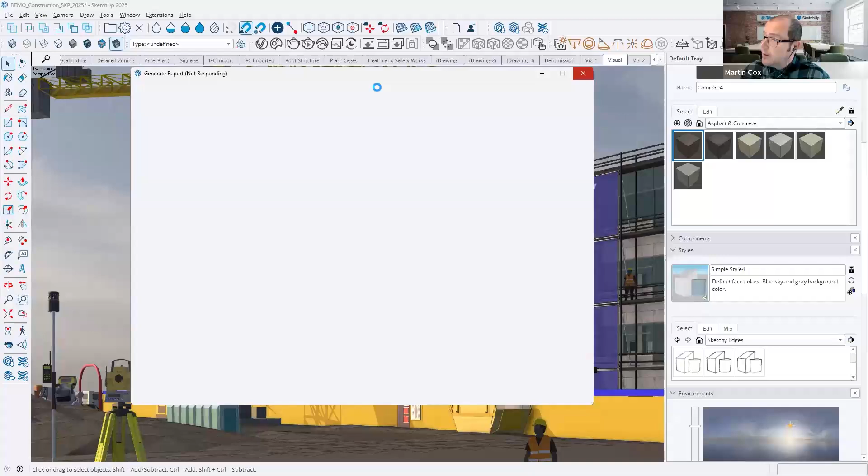A couple of people have asked about the generate report feature. So if we go within file here... and I turn that off... generate report. That was just complete blindness on my part. Generate report - this is how you would set up and generate those reports. It will create a number of settings. It's just loading up our settings because again, it's looking at quite a large model here, so that's just loading up the report generator.

We can already see that there are a number of reports in here, like concrete volume. So there's a report that's been created, and we can then export those reports in spreadsheets, component quantities reports, and I can run those. I'm not going to do that now because it will take a little bit of time, but that's how to create new templates, new reports, and you can start creating things like bill of materials - I saw there was another question around that as well. It will utilize components and show you how many of these particular components and the area around that. There's a number of reports there.

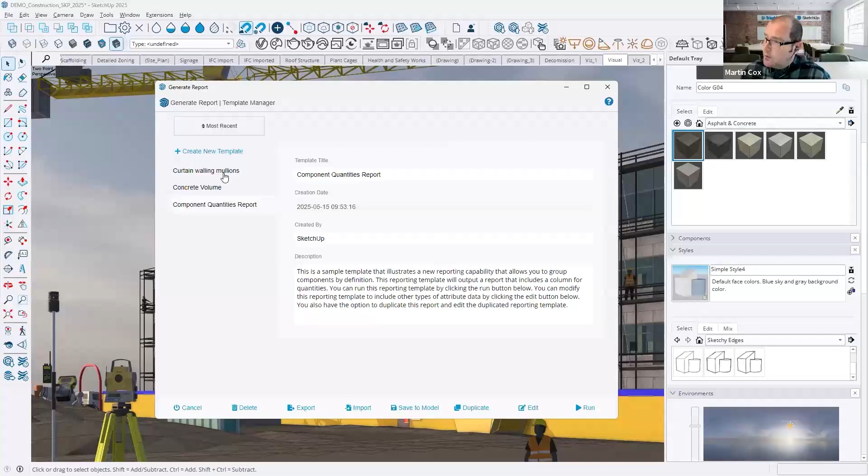If I edit a particular report, like the Curtain walling mullions report here, we can see this is how it's created within the attributes of the models, and then it actually will create and export that report. So, a very powerful tool that not everyone knows about.

Okay, so yeah, people have mentioned about translating work they do in other pieces of software such as Revit and ArchiCAD.

IFC, so when you import IFC models like from ArchiCAD, it will recognize IFC capabilities there. We've done a lot of work on IFC compatibility around SketchUp, making sure it recognizes the IFC metadata and component metadata there as well.

I mentioned the Revit importer. We have that direct Revit import to get your model into SketchUp so you can work through there as well.

Do you have any documentation for Trimble Connect CAD? So if that's information around how to use different 2D drawings in Trimble Connect, yes, there's help around that.

Is SketchUp compatible with Mac? Yes, it is. Now there are some aspects, if you look at SketchUp Studio, that aren't really aimed at Mac, like V-Ray and the Revit importer. But SketchUp Pro is definitely used on Mac as well.

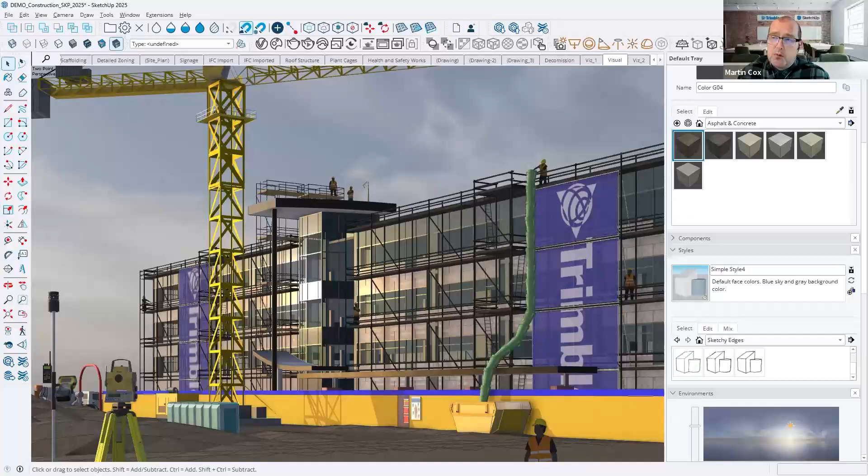Clash detection on MEP and structure elements—in Trimble Connect we have clash detection, so these reports can be run in Trimble Connect. I wish I had more time to show you that, but partners will be able to help with that. Questions around Trimble Connect, absolutely, they'll be able to help with that one. We mentioned that.

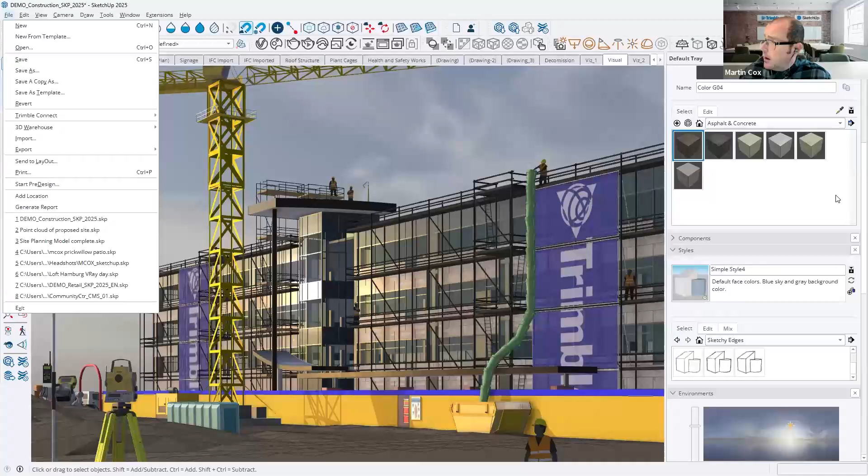A few people have asked regarding import of Revit. It really is as simple as just saying import and searching for the Revit model, and that will come across. Within the Revit model, in those tags it will recognize things like walls, structural columns, roofs, ceilings, floors, doors and curtain walls—it actually recognizes those models there as well.

Can you learn SketchUp by yourself? Yes, there are lots of free courses. To be honest, if you search up SketchUp Learning on YouTube, there are thousands of YouTube videos.

How often is SketchUp used as a site planning tool? Significantly—hundreds of construction companies are using it around that. How is it traditionally done? Often with 2D drawings that get out of date very quickly, and weekly planning meetings to discuss what things are going to be closed that week.

Okay, there are lots more questions. Actually, two people asked the same question, and I'm going to very quickly show that—SketchUp importing DWG files from AutoCAD. Yep, file, import. You'll see that SketchUp was designed to be collaborative, and we can bring in so many different files—AutoCAD DWG files—tidy them up, and actually use them for extruding walls and things like that.

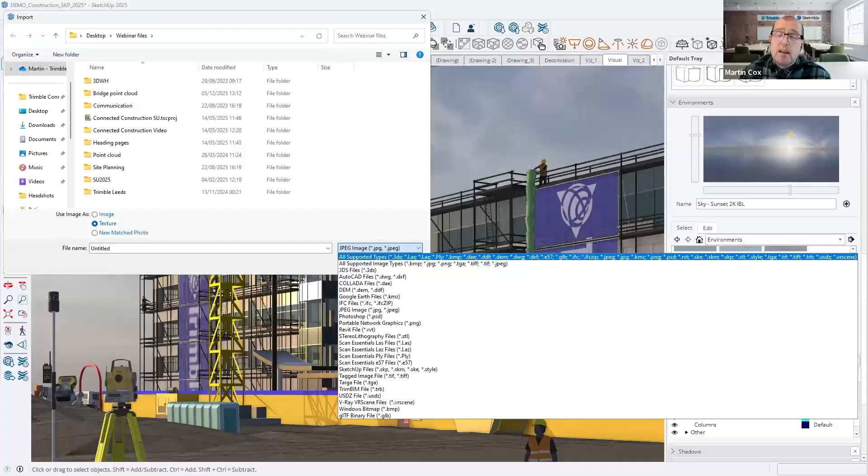Okay, language—yes, different languages are set up in here. The version of SketchUp I'm using today is SketchUp Studio. SketchUp Studio has the Revit importer, it has the point clouds, so you'll see the menus—I've got the V-Ray menu here, I have the Scan Essentials or point cloud menus here, and I also have the Revit importer as well.